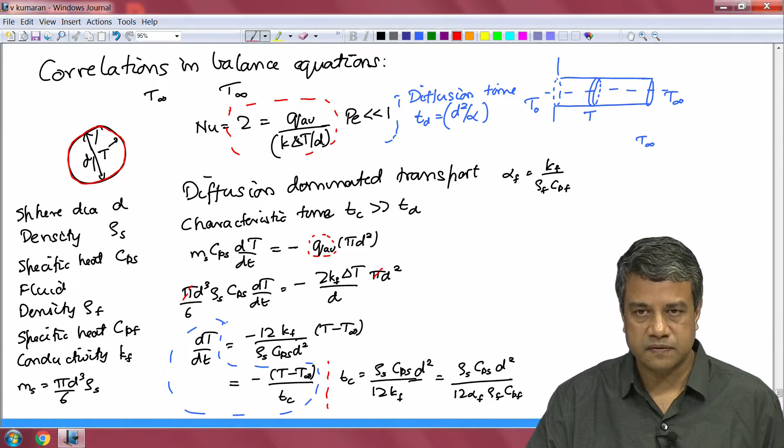In that case, to a good approximation, the temperature field around the sphere is the same as what you would have had under steady state conditions, and therefore you can use the Nusselt number correlation that was derived for the steady state situation. We had seen an example of that for heat conduction from a sphere in the last lecture.

We took a sphere of diameter d, with density and specific heat specified, immersed in a fluid with a temperature difference that varies with time, because as energy is conducted out of the sphere due to the temperature difference, the energy of the sphere decreases, and therefore the temperature of the sphere also decreases.

We had written a balance equation for that: the rate of change of the thermal energy of the sphere is equal to the net energy being conducted out of the surface of the sphere, which is the right hand side, the product of the flux and the surface area.

We had substituted for the mass of the sphere the flux based upon the Nusselt number correlation, and from that we got an equation for the temperature variation with time, shown here as the rate of change of temperature.

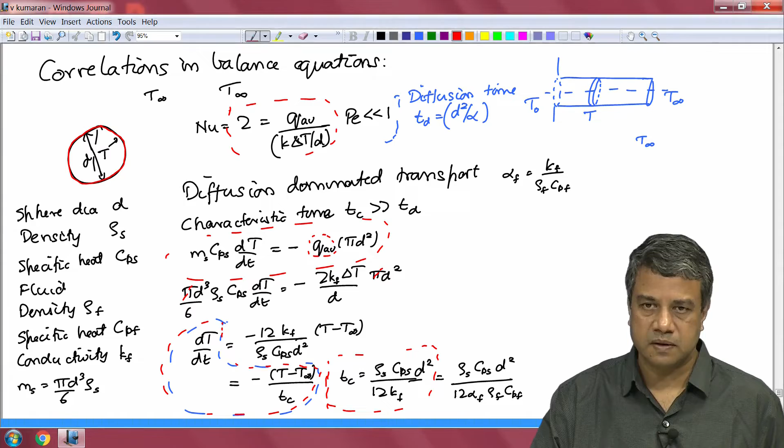This was the expression we had got for the characteristic time. It contains the density and specific heat of the sphere and the conductivity of the fluid. We had assumed that the conductivity of the sphere is much larger than that of the fluid, so that the temperature is uniform everywhere within the sphere, and is the same as the surface temperature. We will see later how to calculate the temperature within the sphere if that assumption is not true. From that we got an exponentially decreasing temperature with respect to time.

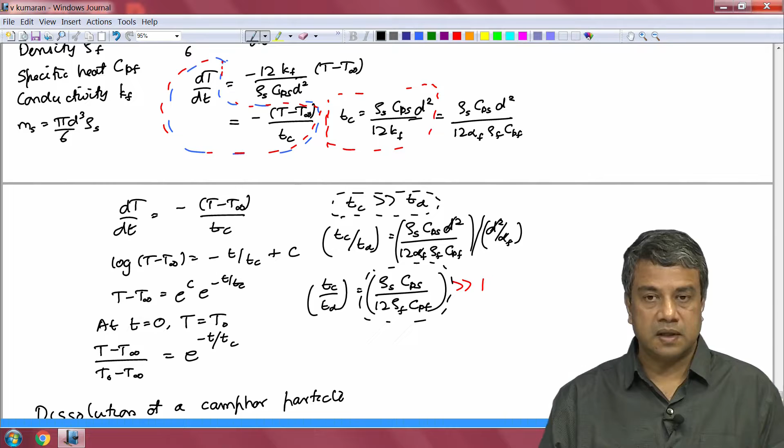An exponentially decreasing temperature, with characteristic time Tc. We had examined the condition under which the diffusion time is much greater than the characteristic time, or the characteristic time is much greater than the diffusion time. The ratio of these two is given by the ratio of the density and specific heat. If this ratio is large compared to 1, then the characteristic time for the evolution of the temperature field is large compared to the diffusion time. Basically, the product of specific heat and density is the change in energy per unit change in temperature. If that for the sphere is much larger than that for the fluid, you can use the steady state approximation for the correlation for the Nusselt number.

Last class we had examined, we had started examining one case where there is a change in diameter. The concentration field changes, not because the surface concentration changes, but because the diameter of the particle changes. So, for definiteness, let us put some numbers here.

Camphor particle with diameter d equal to 1 millimeter, at ambient temperature and pressure. Temperature is equal to 20 degrees centigrade. And the density of camphor, rho, is equal to 10 power 3 kg per meter cubed.

The diffusion coefficient of camphor in air is equal to 2.3 into 10 power minus 7 meter square per second. This is a little smaller than what you would expect for diffusion of nitrogen or oxygen or other gases in air, because camphor is a large molecule, with a molecular weight of about 152.

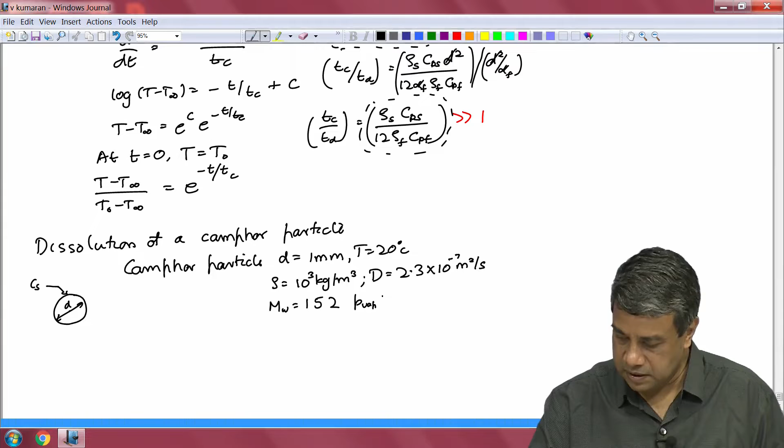And the vapor pressure of camphor in air at 20 degrees centigrade is equal to 87 pascals.

And because of the difference in concentration between the surface Cs and the concentration far away, which is 0, the camphor is going to sublimate, and as it sublimates the diameter is going to decrease with time. What we want to know is the total time for sublimation, that is, when the diameter of the camphor particle decreases to 0. That is what we have to calculate.

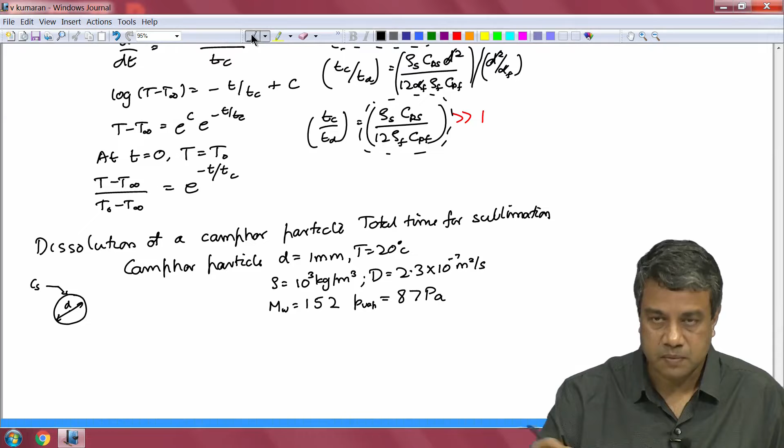So the mass of the camphor particle is decreasing as a function of time. The mass balance equation is going to be dm by dt, the rate of change of mass, equal to minus the average flux into pi d square. Note here that the diameter is now a function of time, since as the camphor sublimates, the diameter decreases with time.

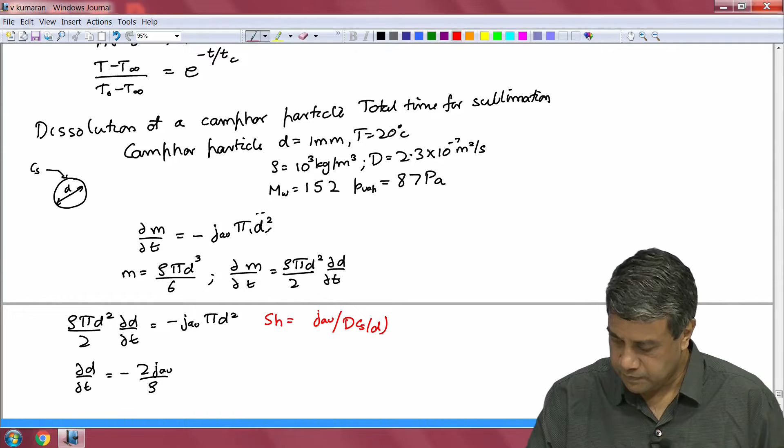And I can use the Nusselt number correlation for this. The Nusselt number correlation for mass transfer is the Sherwood number correlation: Sherwood number equals d Cs by d... Sherwood number is the average flux divided by the right side of Fick's law, the quantity with the same dimension as the right side of Fick's law, which is the diffusion coefficient times the concentration difference. The concentration difference in this case is just Cs. So the diffusion coefficient times the concentration difference, divided by the diameter of the sphere, that ratio is equal to 2. Therefore, I can write this as minus 4, d Cs, by rho d.

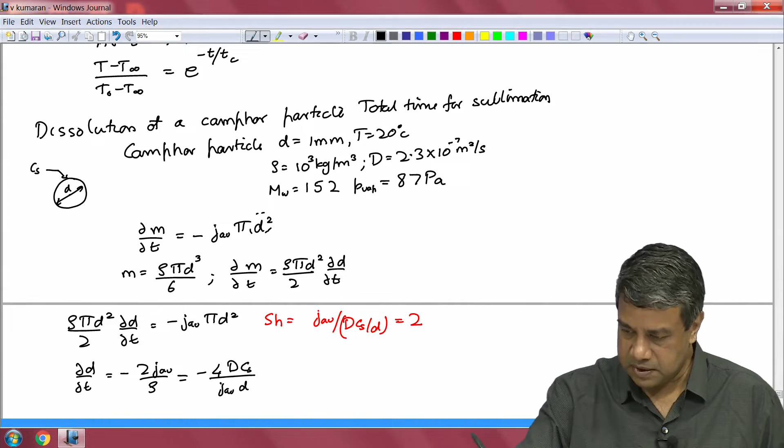We have substituted the Sherwood number is equal to 2 in this case. Now, you can see that there is a diameter on the left and the right side, and that diameter is a function of time. So, there is no j a v here.

The diameter on the left and the right side is a function of time, so I have to multiply throughout by d, in order to get d times partial d by partial t is equal to minus 4 d Cs by rho, where rho is the density of the camphor particle.

The left side is equal to half partial by partial t of d square, which implies that partial d square by partial t is equal to minus 8 d Cs by rho.

And you can integrate this once in order to get d square is equal to minus 8 d Cs t by rho, plus a constant of integration. That constant of integration is determined from the condition that at t is equal to 0, d is equal to the initial diameter d naught. D naught is the initial diameter, in this case 1 millimeter, which will give us that c is equal to d naught square.

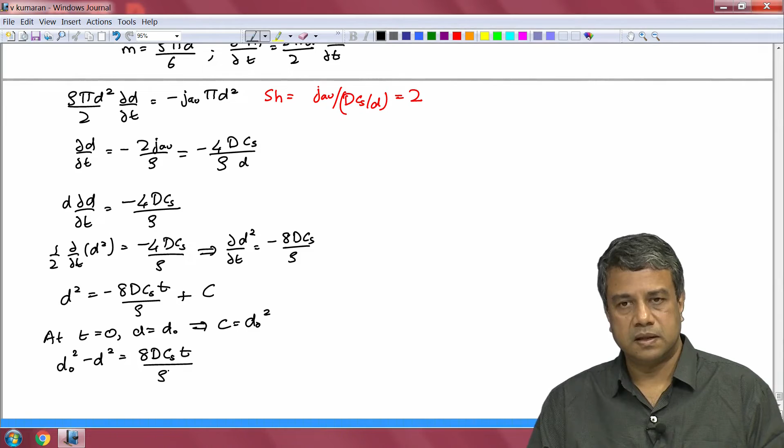And therefore, the equation for the diameter becomes d naught square minus d square is equal to 8 d Cs T by rho. Alternatively, d square minus d naught square will have a negative sign. I just put here d naught square minus d square.

What is the total sublimation time? T is equal to Ts when d is equal to 0, that is, the sphere has completely disappeared. So, that is the sublimation time. When d is equal to 0, that is the time required for complete sublimation, and you can see that the time required for complete sublimation is going to be equal to rho d naught square by 8 d Cs.

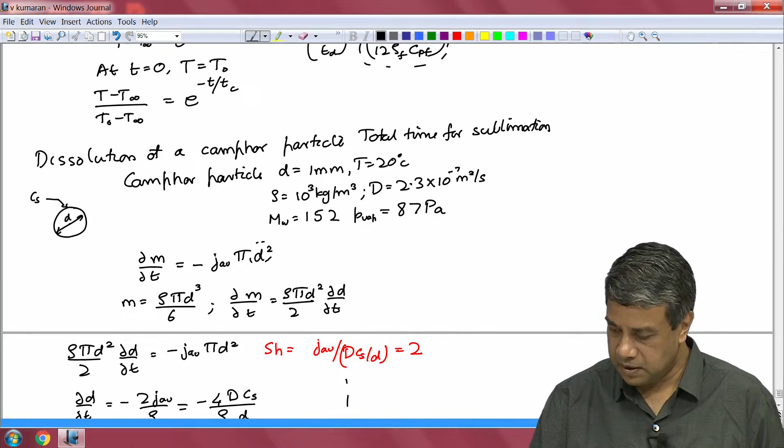So, for this particular case, what is that sublimation time? Let us calculate that. First thing is, we need to calculate what is Cs. We know all other quantities here - the density, the diffusivity, etc. is all given, the diameter. What is Cs? Let us calculate that.

From the ideal gas equation of state, Cs is equal to P, the molecular weight, by kBT. This is the vapor pressure. The molar concentration is P by kBT. The mass concentration is P times the molecular weight by kBT. P by kBT is the number of molecules per unit volume. Multiply that by the molecular mass, you will get the total mass per unit volume.

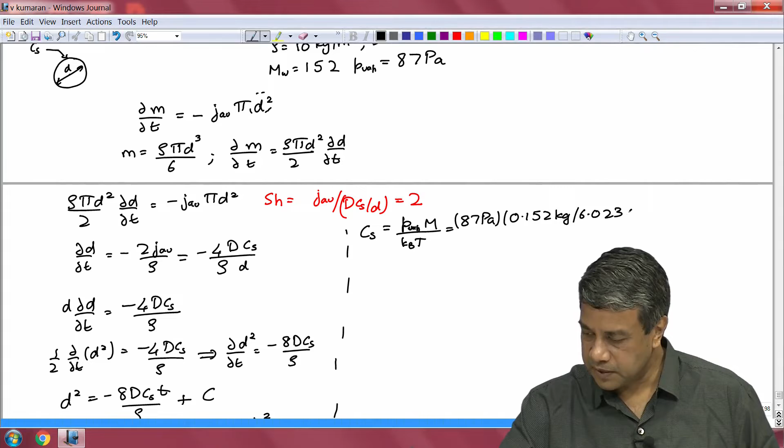So, in this case, the vapor pressure is equal to 87 Pascal, into the molecular weight is 152 grams per mole, or 0.152 kilograms per mole, and each mole contains 6.023 into 10 power 23 molecules. That is 0.152 kilograms per mole, divided by Kb, 1.38 into 10 power minus 23 joules per Kelvin, into T. T is the absolute temperature. 20 degrees centigrade is 293 Kelvin.

If I had used the molar weight, then I would have to use the ideal gas constant R in the denominator. Either way, you will get the same result. And you can easily see that the result is that this is equal to 5.43 into 10 power minus 3 kg per meter cubed, which is the mass concentration of camphor at the surface.

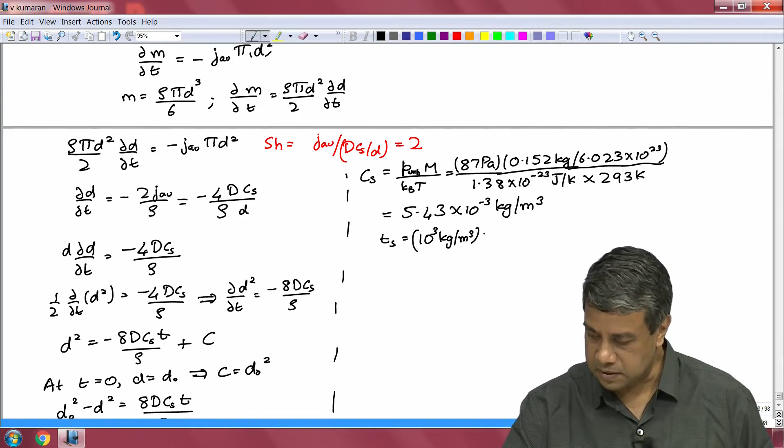And we have just got to substitute this into this expression for the sublimation time, to get Ts is equal to rho, the density, if you recall, of this camphor was 10 power 3 kg per meter cubed, into d naught square. D naught is 1 millimeter, so 10 power minus 3 meters is the initial diameter, the whole square, divided by 8 into the mass diffusion coefficient was 2.3 into 10 power minus 7 meter square per second, into concentration at the surface, which is 5.43 into 10 power minus 3 kg per meter cubed.

And this can be evaluated. You get this as approximately 10 power 5 seconds, which is about 1.2 days, or more precisely about 1.16 days, the time required for the sublimation of this camphor of diameter 1 millimeter. It takes more than a day for the entire material to sublime and go into the vapor phase, for this set of surface parameters and bulk parameters.

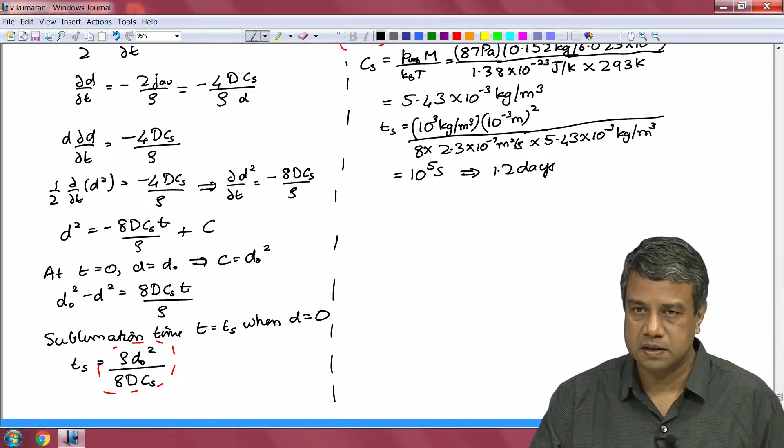And that is the reason that you have to keep camphor in airtight containers, so that it is not exposed to ambient air where the concentration is 0 and does not go on subliming. If you put it in an airtight container, then the concentration becomes equal to the saturation concentration pretty quickly, and after that there is no further evolution.

The last thing we have to do is to verify that the time required for sublimation, which is basically the time scale for the decrease of the diameter of the particle, is much larger than the diffusion time. What is the diffusion time in this case? The diffusion time in this case at initial times is going to be equal to d naught square by the diffusion coefficient.

And you can evaluate this. This is equal to 10 power minus 3 meters, that is the initial diameter, whole square, divided by the diffusivity, which was 2.3 into 10 power minus 7 meter square per second. And this works out to approximately 4.35 seconds.

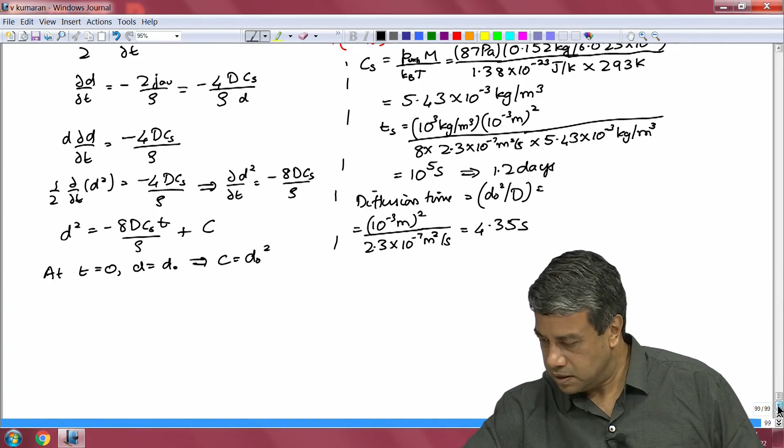So this is for diffusion dominated flows, where for the flow around a sphere, for the transport from a sphere, whether it is heat or mass transfer, is primarily due to diffusion, and we know that when the diffusion is dominant, the Nusselt number and the Sherwood number are constants. So next I will examine forced convection.

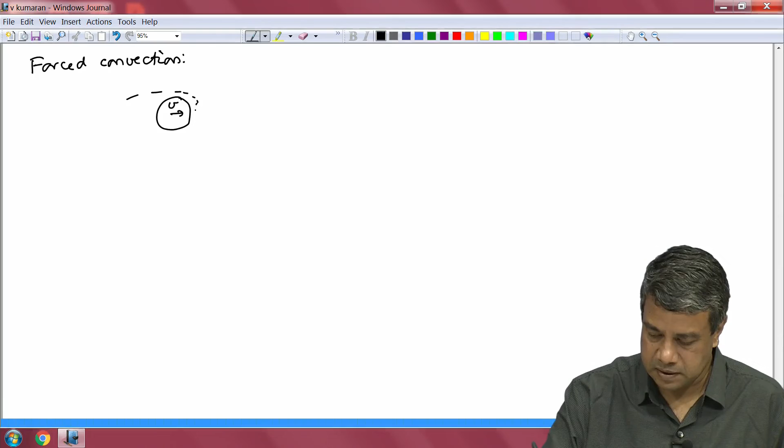Now, in forced convection, for example, you have a particle that is moving relative to the fluid, with some velocity v. And if you look close to the surface, the fluid is getting swept backwards around the particle.

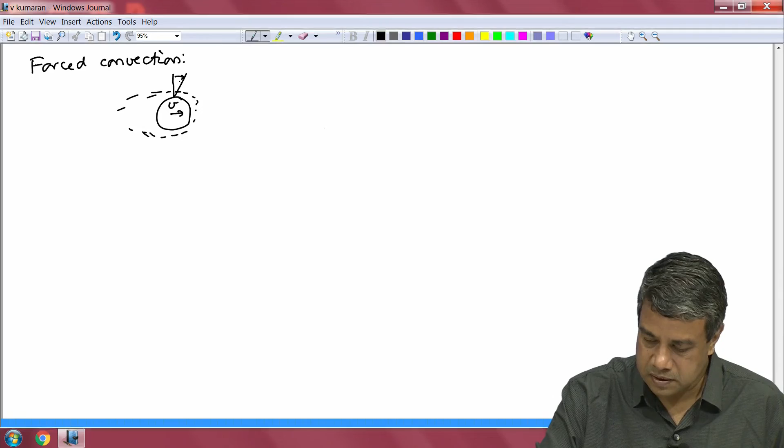And you could have two different situations based upon the boundary conditions. If this were a solid particle, then relative to the particle center, the fluid velocity has to decrease to 0 at the particle surface.

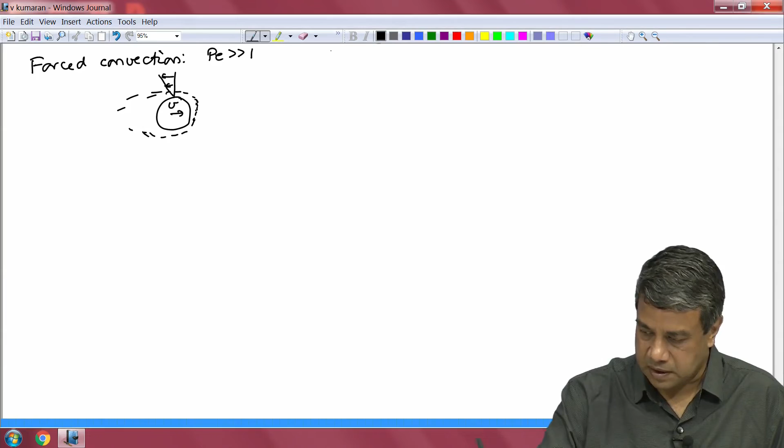And if we consider the situation where the Peclet number is large, for forced convection problems, because convection is dominant compared to diffusion when the Peclet number is large. However, even when the Peclet number is large, if you go very close to the surface of the particle...

there is convection due to the fluid flow along the surface. However, there is no convection perpendicular to the surface, because of the no penetration condition at the solid surface. There is no flow perpendicular to the surface, and therefore there is no convection perpendicular to the surface. So, ultimately transport perpendicular to the surface has to be due to diffusion, in the case of solid particles. So you have a situation where material is diffusing out from the surface, say.

If we assume that the surface has a higher temperature or concentration with respect to the bulk, the material is diffusing perpendicular to the surface and it is being rapidly swept downstream due to the strong flow.

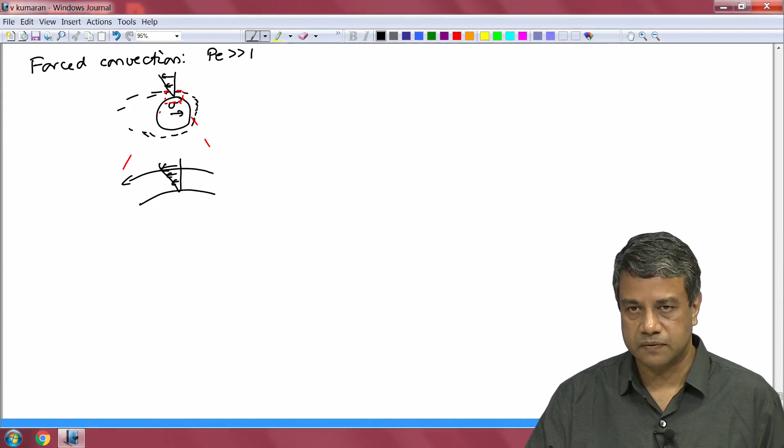In this limit, you have to incorporate diffusion close to the surface, even though the Peclet number is large, because ultimately transport perpendicular to the surface has to take place due to diffusion. But once it diffuses perpendicular to the surface, the strong flow rapidly sweeps the material downstream, so the change in concentration due to diffusion is restricted to a thin region close to the surface, much smaller than the particle size, in the limit of high Peclet number.

The length scale for diffusion, for example for a solid particle where there is a no-slip condition at the surface, so that the velocity decreases to zero at the surface, is equal to Peclet number to the power minus one-third times the particle diameter, the characteristic particle diameter, if there is a no-slip condition at the surface.

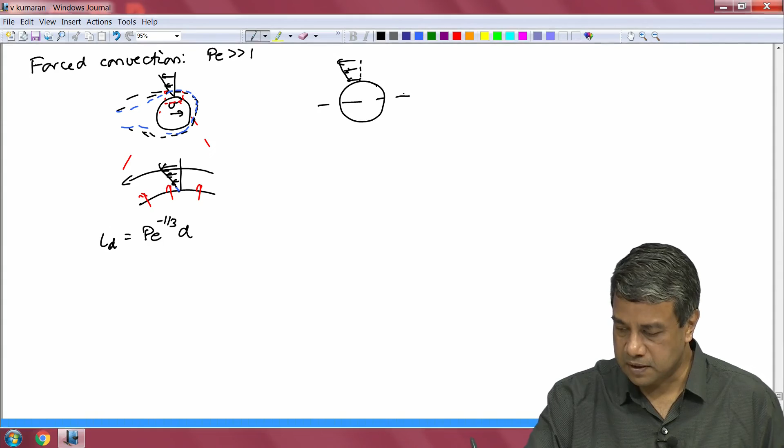On the other hand, if I had a gas bubble, for example, where there is a non-zero velocity at the surface, once again, as there is fluid flow around the surface, the diffusion of mass or energy from the gas, which is at a higher temperature, transports perpendicular to the surface due to diffusion, and it will be rapidly swept downstream due to convection. In that case, the characteristic length scale is equal to Pe to the power minus half times d.

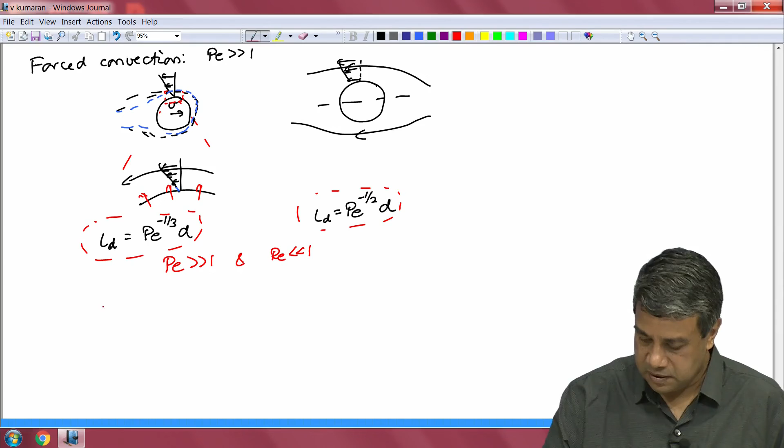For transport from a gas bubble, these length scales apply in the limit of Peclet number much greater than 1 and Reynolds number much less than 1. If I have a laminar flow, but a high Peclet number flow, where convection for heat and mass transfer is dominant compared to diffusion, then these are the length scales for diffusion from the surface. And of course, the time scale for diffusion has to be equal to the length scale for diffusion squared, divided by the diffusion coefficient - that is the characteristic time scale for diffusion.

This diffusion length and diffusion time has to be much smaller than the time required for evolution of the temperature of the particle if we are to use the steady state approximation for forced convection problems. So this is only for Peclet number large compared to 1 and Reynolds number small compared to 1.

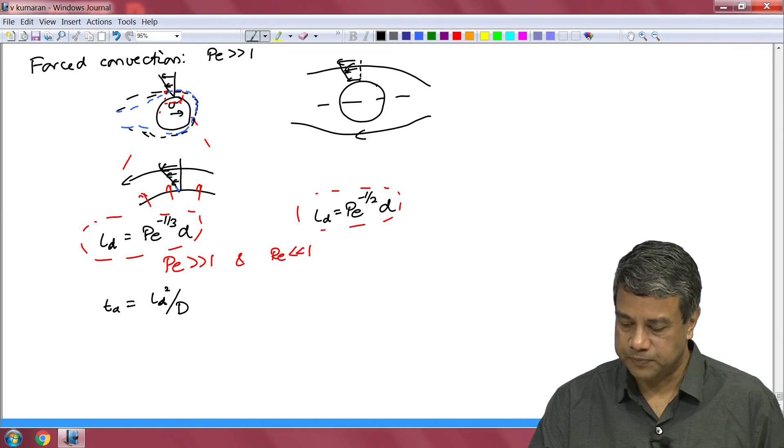You have other relations when the Peclet number is large and the Reynolds number is large, but for a laminar flow, for flow around a particle, flow through a pipe. I will discuss all of those length scales one by one in the next lecture, so that we have a clear idea of under what conditions we can use a steady state approximation for the diffusion process in a situation where the temperature at the boundaries, or the dimension of the boundary, is varying, is evolving in time.

Obviously you can use it when the diffusion time is much smaller than any other time scale in the problem. So we will discuss the same issue - I have discussed it for a particle with a no-slip condition, and a mobile interface with a slip condition at the surface, for large Peclet number and for laminar flow at small Reynolds numbers.

We will discuss it for other situations - flow past a flat plate, flow in a pipe - and then we will solve some examples of how we can actually evaluate the variation in temperature with time using a correlation for the instantaneous average flux, assuming that instantaneous average flux is the same as what you would have had the system been at steady state.